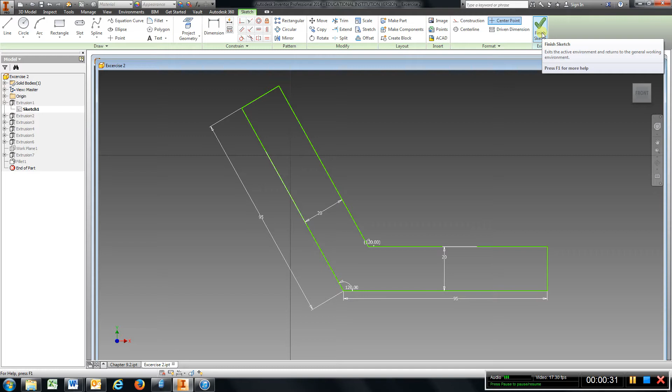Finish sketch. Your extrusion is going to be 80 millimeters, so extrude that 80 millimeters, check it off.

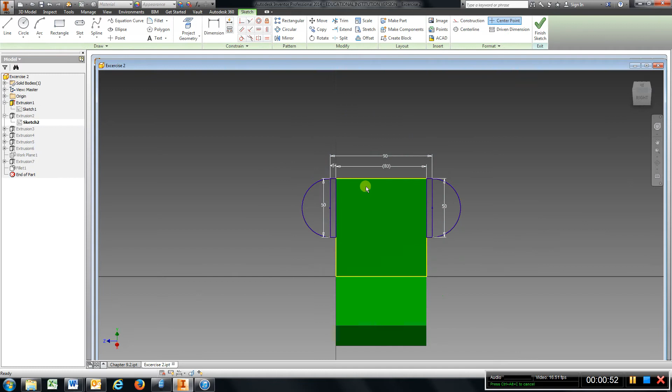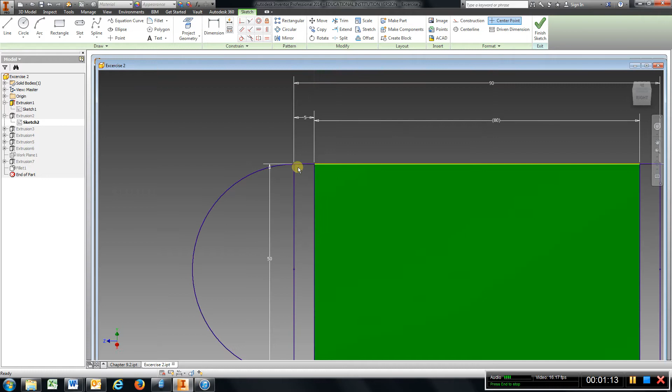Go to your next sketch here, edit sketch, and notice this part you extruded is 80 millimeters. You're going to start out with two circles. So actually you're going to use circle, and you're going to come over 5 millimeters and create a circle here and another circle here, and also you'll use trim command to trim off part of the circle you don't need,

but you're going to also create this rectangle here, 5 millimeters by 50, and it's going to be tangent with the top of this first extrusion. So everybody kind of take a look at this. So all you're dealing with is two circles and two rectangles, and make sure you have the correct dimensions here.

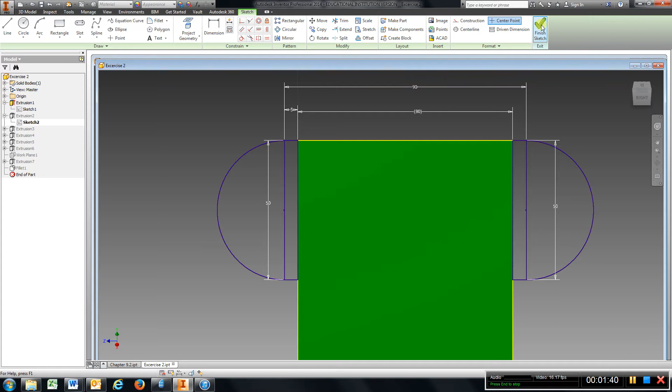So once you finish that, you're going to extrude those. I'll give you a closer look at it. You can see the two parts here that you're going to extrude. You're going to extrude them 20 millimeters. Hit OK.

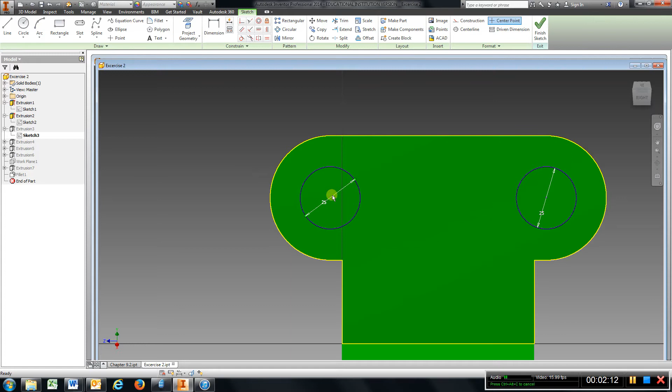Next sketch. You got two 25 millimeter circles using the same center line. So just go to circle, put two circles here, finish sketch, and just extrude those back 20 millimeters. Cut those out.

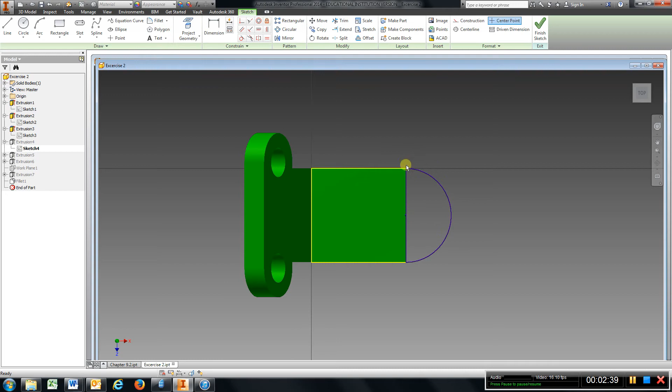Next sketch. Find the center right here. Use circle. Find the center and put an 80 millimeter circle right on that center. And extrude it down 20 millimeters here. Make sure you don't join there, 20 millimeters.

Next sketch. Draw a 65 millimeter circle. Use the same center line as this circle. Finish sketch. Extrude it up 25 millimeters.

Next sketch. You're going to use the same center line. Create a 35 millimeter circle. And you're going to use cut. You're going to use extrude, cut, and cut that all the way through to create that hole.

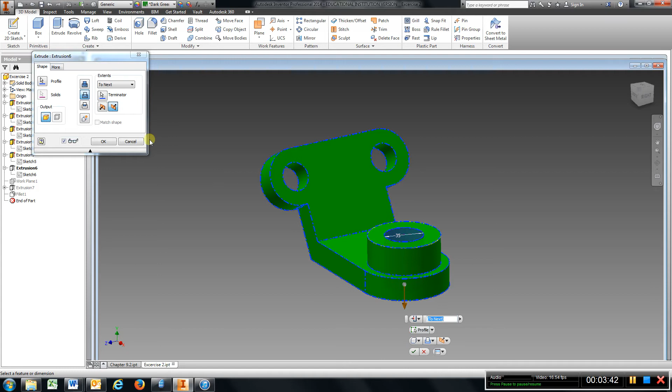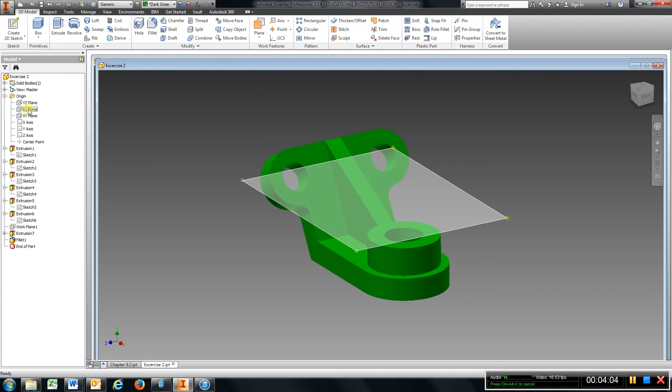And the last we have is the gusset. And you're going to create a work plane. I'm going to open up the origin. Here's your work plane. You're going to click here. You're going to go over and find the correct work plane here that you want,

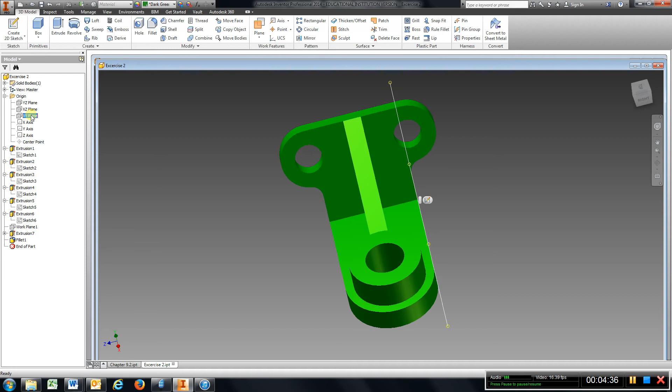and because it's lined up on that edge, what I'm going to do, with the work plane, you're going to grab it here and move it over 40 millimeters to get that plane right in the center where we can sketch. Okay, so again, use plane. Find yours may be different. It depends on the plane you started with, but make sure that it's this one here, and offset it 40 millimeters.

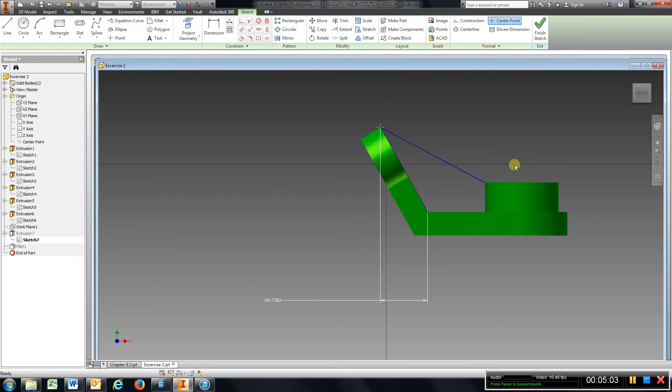Okay. Once you have that, you're going to create a sketch on that plane. And what you'll do, to get a better look, you can come out here, right click, and slice graphics. And what it will do, will cut that part in half for you where you can see what's going on here. And you'll draw this triangle.

What you'll have to do is use project geometry, and project geometry of all these lines here and here and there. And once you have that, use your line command, draw this polygon here like that.

You can't go to here and here because this is a round surface and it'll leave a gap. So you just come in a bit into that, right through that corner and down. Doesn't matter as long as you don't go past the hole here, and recreate this on the sketch plane.

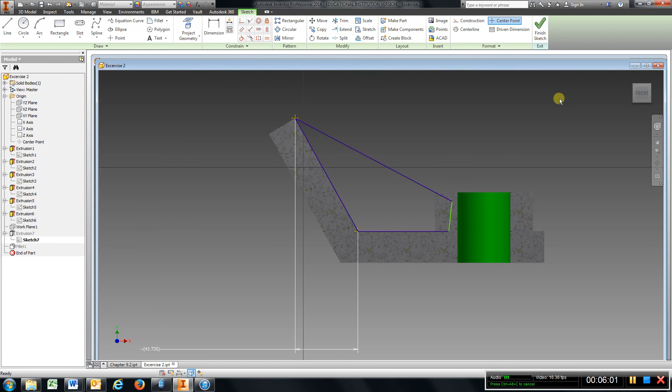Once you have that, you're going to join, you're going to go to extrude join, and you're going to choose, if you have it right in the middle, you would choose this one, type in 16 millimeters and hit OK.

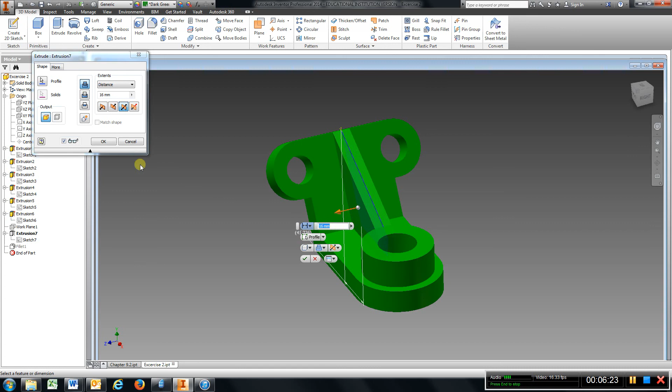And the last thing to do is your fillet. You're going to put a 10 millimeter fillet on this side and on that side. And again, if some of these steps you don't understand straight away, go back and just keep repeating them.

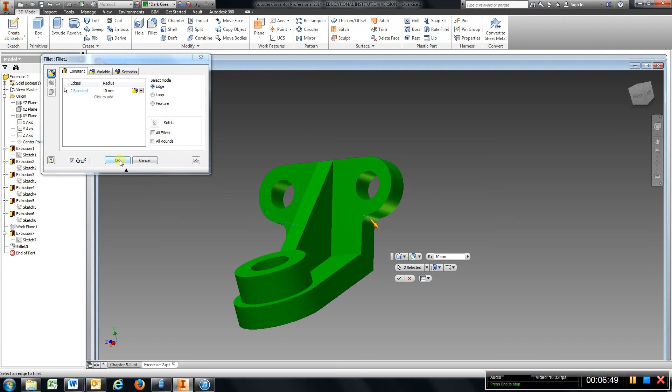And there you have exercise 9.2, angle support.